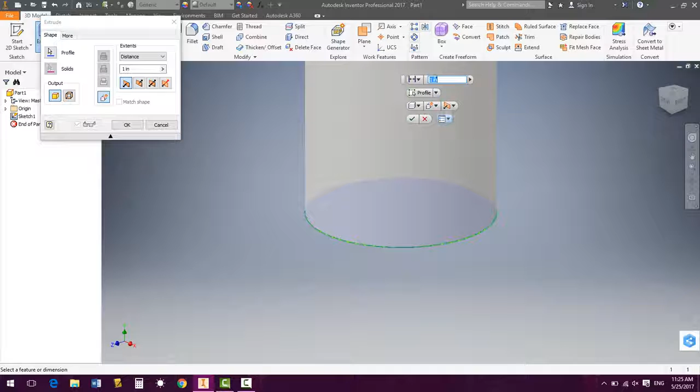I'm going to start with my circle, and since the diameter can be anything I choose, it doesn't matter. I can click and just make my circle, then finish my sketch. Then I'm going to extrude it, and this is where I need to enter 3 for the 3 inches in length. Once I'm done, I have my cylinder for question number 1.

Question 2 says draw a 4-inch cube. So I'm going to start off using my rectangle tool. I'm going to pull out, and where I have the blue number highlighted, that's where I can enter my number. So I'm going to enter 4, hit tab on the keyboard, then 4 again, and hit enter.

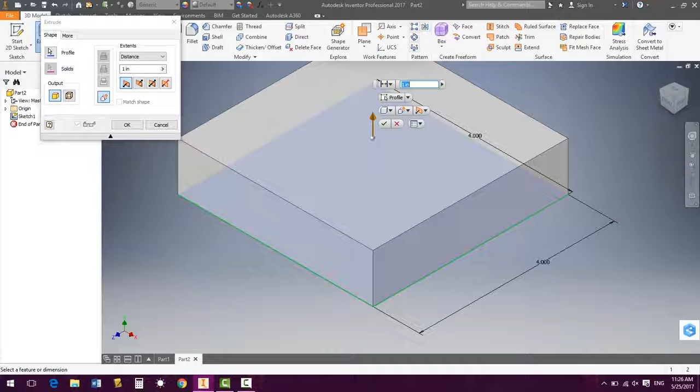Zoom us back in. If for some reason you enter the wrong number, at this point you can use the dimension tool, click on that side and pull out, and it will allow you to adjust that dimension. You'll see this, and you can double click that line. But if this didn't exist, I could click on this side, pull out, and it would allow me to change that number. Once I have my 4x4 square, I'm going to extrude it, and because it's a cube, I have to make sure it's 4x4x4, and there is my 4-inch cube.

For my next part, we need to do a rectangular prism that has a length of 3 inches and a width of 4 inches. I don't give an extrusion here, so you get to extrude that however you want, but I need to make sure that my length is 3 and my width is 4.

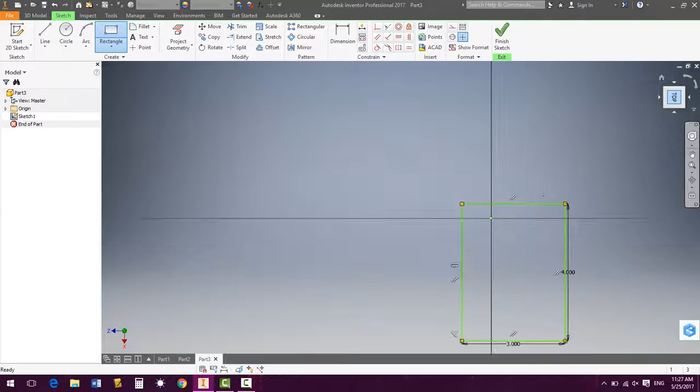So I'm going to go again with my rectangle tool. The first number highlighted along the right hand side, that is actually going to be my width, so I need to put a 4 there. My other is my length, the one from left to right. Then I'm going to finish this sketch, and because it does not tell me a specific extrusion, I'm just going to hit extrude, and 1 inch is fine, and then I have my rectangular prism.

To draw my next question, I have draw a sphere with a diameter of 6 inches. So I need to first off draw a circle, and again, noticing the blue highlight, that is where I need to make sure that my diameter, which is the distance all the way across the circle, is 6 inches.

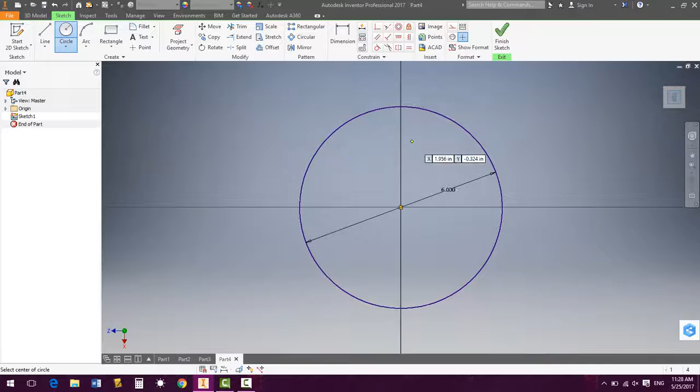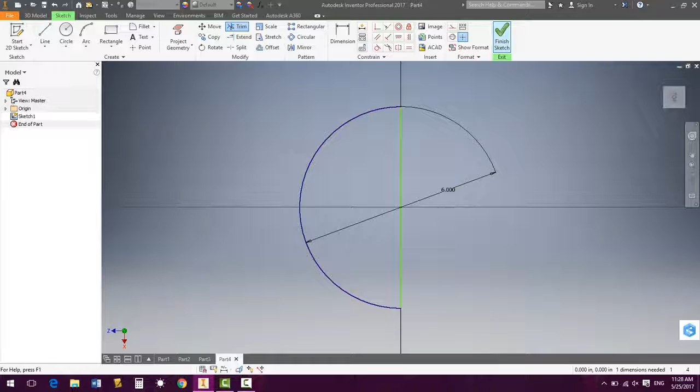Still within my sketch mode, I need to draw a line from top to bottom. Notice that when I hover over, the line will change from that dark blue to almost a black, letting me know that I did click on the circle. Then I'm going to trim away half of my circle. It does not matter which half I trim. This line remaining is just a dimension line, it's not actually part of that shape, so it's nothing to worry about. After I trim, I can hit Finish Sketch.

Then I'm going to use the Revolve feature, and I'm going to click that center axis. Sometimes you'll have to click the axis button for that line to turn green. This is how you get to a sphere.

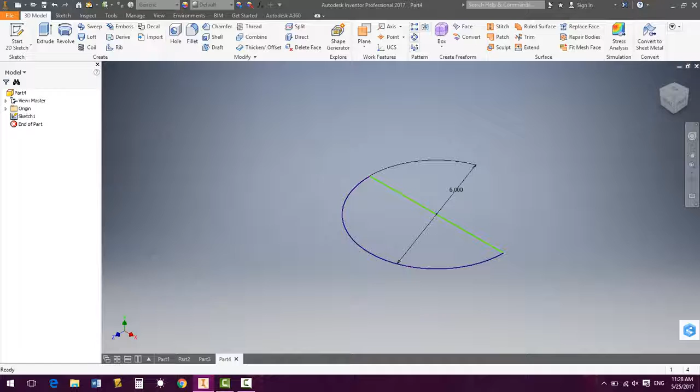How to get to a half sphere, which is question 6: you can draw any size circle, draw your line to cut it down the center, trim away half of it, and then when you go to hit revolve, instead of allowing it to do a full revolution, we're going to hit 180 to have it do a half revolution, and that will then give us our half sphere.

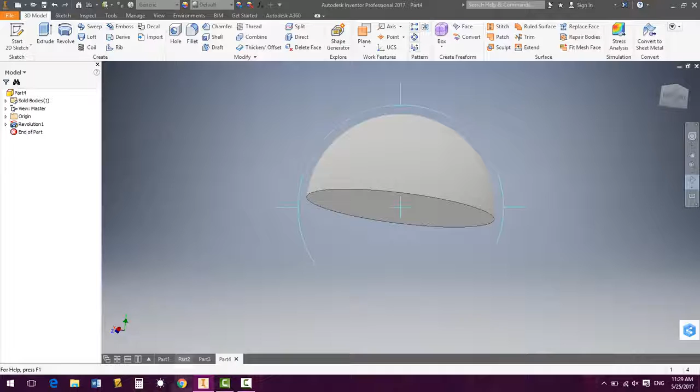Our next question is drawing a cone of any size. So for this cone, what I need to do is have a right triangle. It is very important that it is a right triangle. If it's not, you will not get a cone.

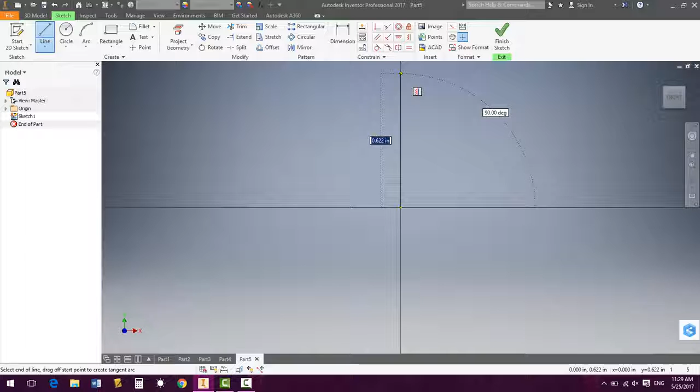Start in your center, noticing that the dot does turn green. Because size on this won't matter, I'm just going to go up straight. I'm going to come down to my other axis line, and then again connect at the bottom.

Once I have my triangle, notice that I've got a blue line, a blue line, and a green. The green is your hypotenuse and the blue are your two legs. So once that sketch is finished, I can revolve either of my blue legs. I do not want to revolve the hypotenuse, that will not get me a cone.

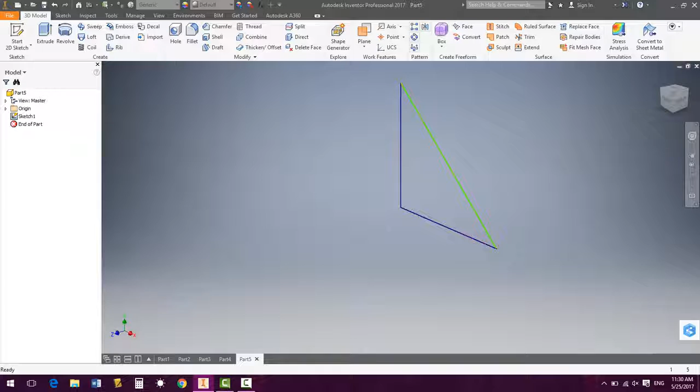So when I go to revolve, again, I can pick this leg or I can pick this one. It won't matter which, but I will allow it to revolve at a full spin. And at that point, then I have my cone.

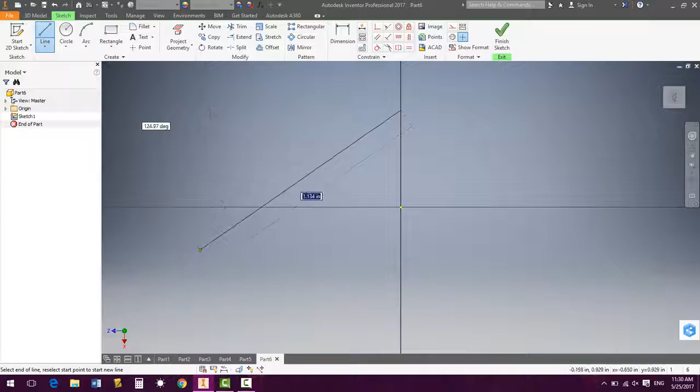The last question on the quiz asks for you to draw a triangular prism of any size triangle that is extruded to 2 inches. At this point, it does not matter what style triangle you make. For the cone, you have to do the right triangle, but for our triangular prism, it does not matter. We could do any style of triangle we want as long as we end up with a triangle.

I finished my sketch and I'm going to then extrude it, and it did tell me to extrude it 2 inches, so I will need to change my extrusion to 2. And there I have my triangular prism.